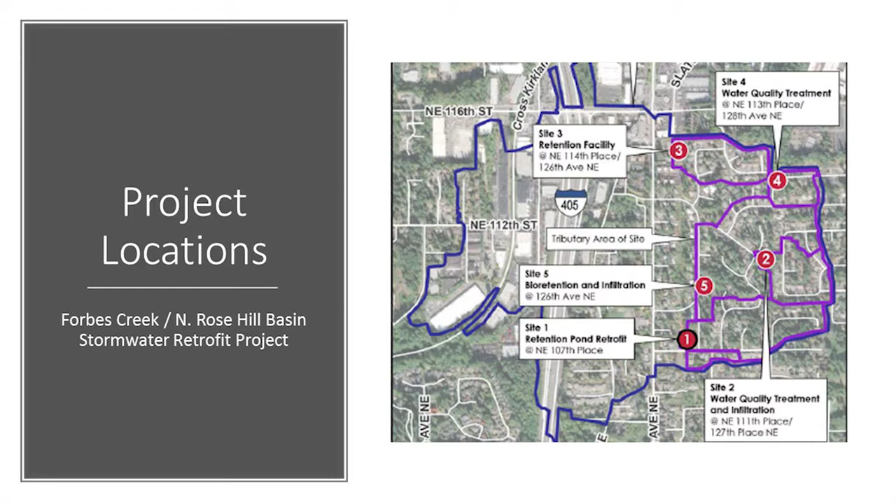Just a little bit about this subbasin in pictures. This is an area of Kirkland that was incorporated into Kirkland in the early 1980s and still retains some of its unincorporated King County flavor, if you will. There are definitely some sidewalks and curbs, but there are a lot of streets that don't have that infrastructure. There's definitely some older vegetation.

And I'm going to say that there's a lot of people in this area that have lived in Kirkland their entire lives, perhaps even have lived in that same house their entire lives. And we definitely met in our engagement a lot of maybe seniors, fixed income and whatnot, that were concerned about things like property taxes and not at all concerned about stormwater. So I share that now in the context before we go into the specific projects, because that absolutely came up.

All right. I want to share a little bit about the basis of site selection and project design. I know there are 6 bullets here. I'll focus on the first 4, and then the last 2 we'll talk about a little bit more in detail in this presentation. So first and foremost, we selected sites that provide the opportunity to treat as much pollutant-generating hard surface as possible. The primary goal of these projects was to provide a water quality benefit, but flow reduction to reduce flooding risk downstream was also a focus.

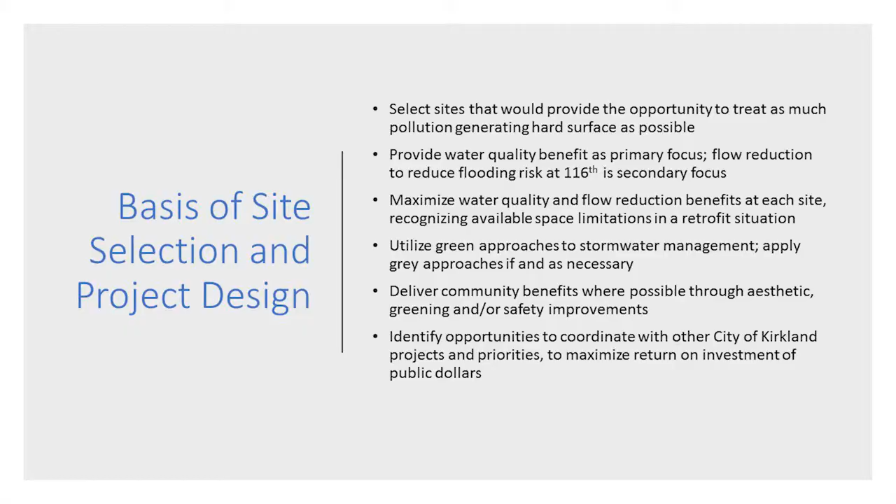All right, so I mentioned earlier when we looked at the map, we went to the public with 5 potential sites, and once selected, we selected as a team 3 sites to move into 30% design, and this is one of the 3. This particular site was an existing stormwater pond, but this project is retrofitting that pond to make it bigger, to put in bioretention, to change the plumbing such that more flow went into the pond, and then also to add some aesthetic features, softening of the edges, some plants that promote pollination and whatnot.

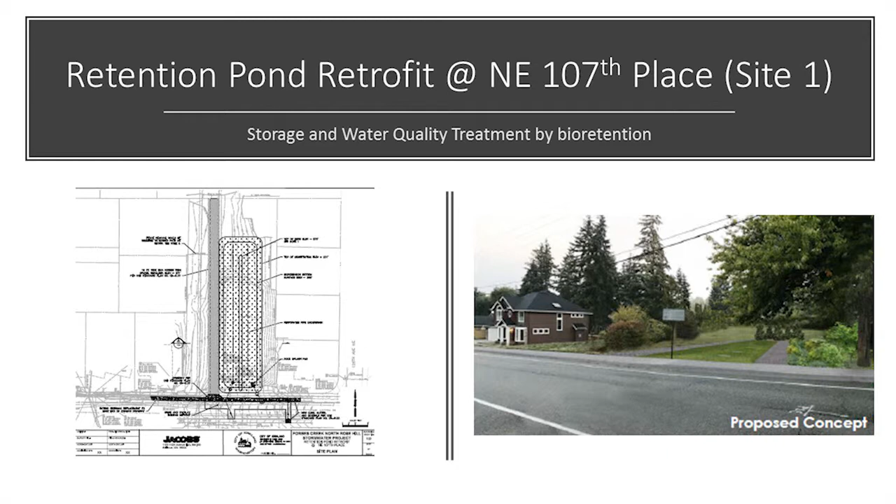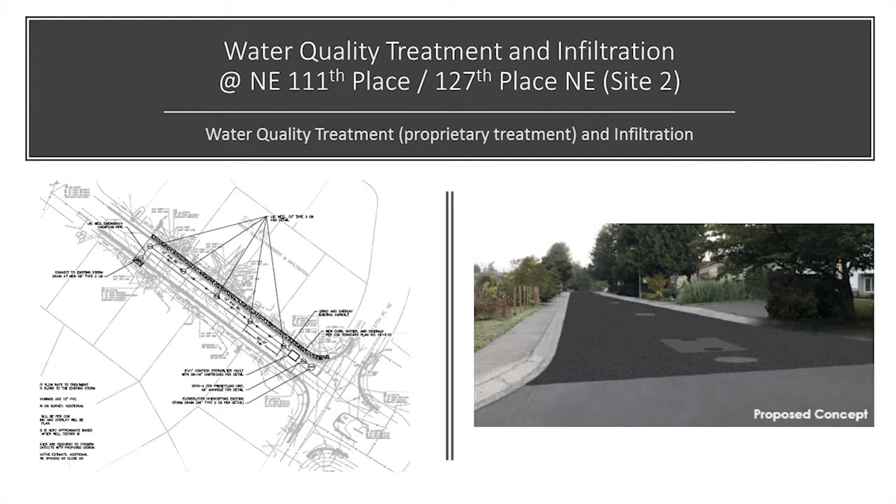This next site, site 2, is actually putting in proprietary water quality treatment and then UIC wells. And this is one that really, in its current form, does not have any sort of community benefits up top on the street side. Once completed, it would be fully hidden. What else to say about this? Maybe I'll just leave it at that.

And then this third site ends up being, we think, the most exciting. It also will be the most challenging. And this is one that has a heck of a lot of elements to it. So bioretention cells to treat stormwater coming off the roadway and then any connected driveways and houses. There's a proprietary treatment to treat the flows coming in from off-site onto this location, and then also storage.

What we really had envisioned from the beginning was using UIC wells at this location. After geotech came back that we couldn't do infiltration, we switched that to storage. So a lot going on here with treatment, storage, and then the bioretention as well.

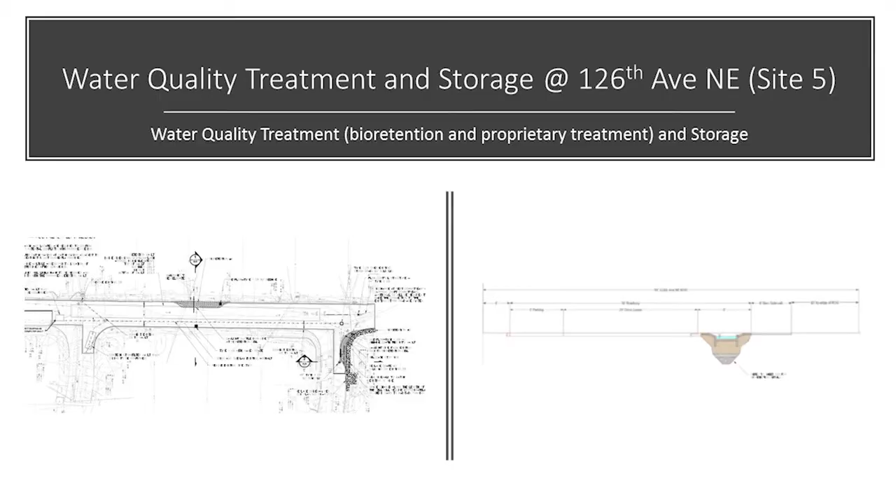All right, so now I'm going to transition to talk about lessons learned, and I'm going to focus on the efficiencies related to site selection and design, and then I'm going to hand it off to Jenny to talk about lessons learned related to the community. So my first lesson learned with efficiencies is just perform survey and geotech early, which is kind of a no-brainer. At the same time, you can't do it everywhere. We couldn't do it at 5 sites. We could do it at 3 sites.

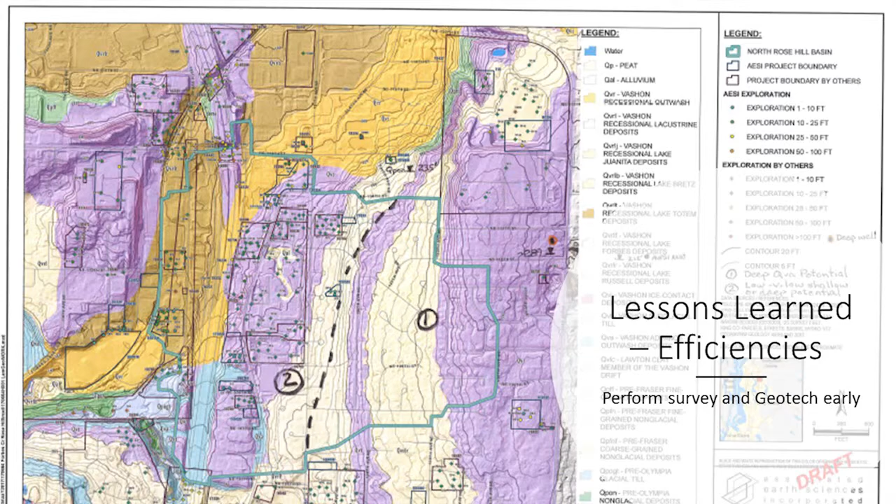And I say that because in the end, this is a good lesson learned as we're putting in 30% design now. We really did have to go back and rethink that last site that I talked about, when we figured that we couldn't do infiltration. We had a nice design there with UIC wells. It was elegant, it was pretty, it was wonderful, and then it wasn't going to work. So something to think about when you're planning a project is when you are going to do that survey and geotech, knowing that the earlier you do it, you might have to do it at more places because you haven't selected your site.

Another lesson learned as far as efficiencies is the importance of coordinating throughout the project. And by coordinating, I mean both with city departments and with the public. I show this cross-section that we actually went to the public with for this last and final site. And we're so glad we did, because we got the feedback that the public wanted to keep their parking, which is not an unusual thing to hear. But also, the public wanted to keep the vegetation that was there.

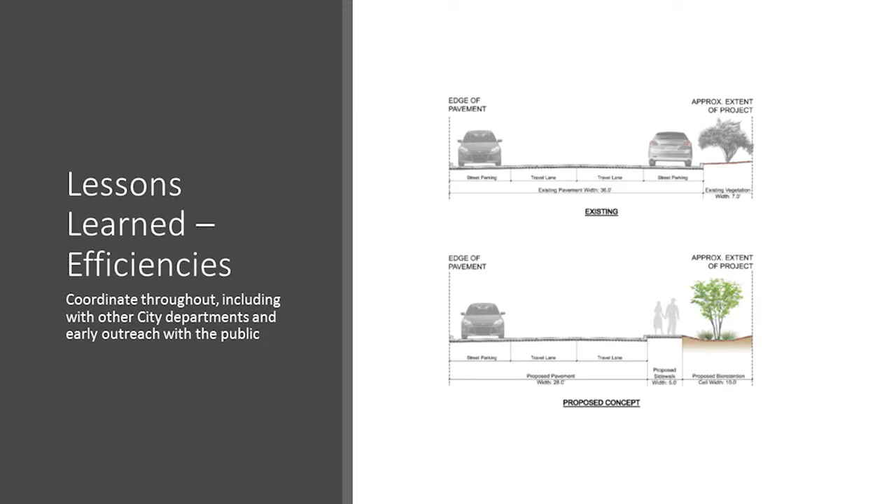And I think the other part of this is coordinating with city departments. Absolutely, we need to know requirements for width of roadway and whatnot. And then two, is there an opportunity to push the envelope or negotiate that within the city before you get too far in the design?

This last lesson learned on efficiencies: stay focused. Identify projects that are implementable and acceptable by the public and stakeholders in the short term. So we took 5 projects to the public. I think one of our favorites was this Site 3, an open piece of property proximate to the Seattle City Light high power lines, a lot of opportunities for stormwater management and a park, and we wanted to do all these things.

But that said, realistically, all of those things take several years at best to get right. A lot of coordination, a lot of rounds and whatnot, and in the meantime, every rain event, more pollutants are going downstream.

And so, I guess, lesson learned in a good way for us on this project is, yes, absolutely, the city should pursue this project, but do it in parallel with advancement of these individual projects under this grant to get those individual, somewhat easier projects in the ground quicker, to get those pollutant reduction, flow reduction benefits quicker, and in parallel work on these meatier, larger, more complicated projects.

And with that, I'm going to hand it over to Jenny to talk about lessons learned with the community benefits.

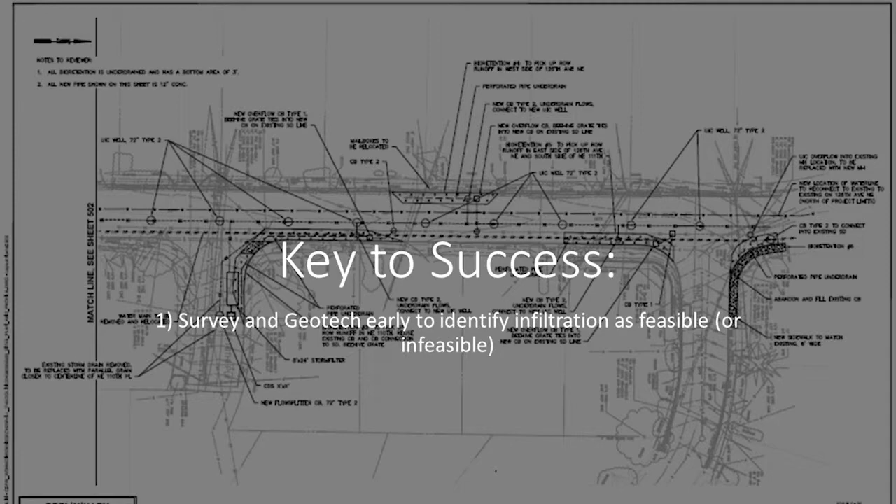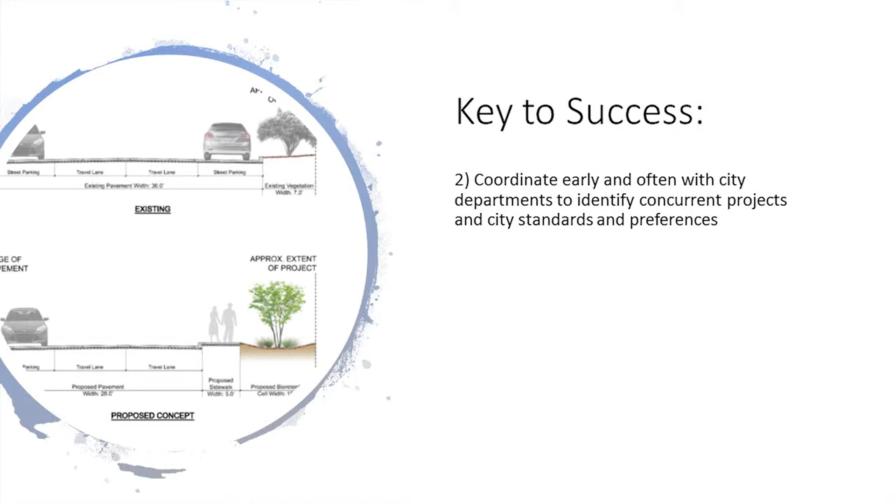So again, coordinate early and often. Talk to your traffic planning folks. Talk to your development folks. Talk to your street preservation program. Is this street due to be overlaid next year and your project is going to come the following year and rip it up? Just all of that coordination stuff that makes people support your project and want to do it came through in this project really strongly, and I think that helped it be successful.

Again, conduct the public outreach early and often. Make it specific and listen. When the community says they want their parking, don't take away their parking. Figure out another way to do the project. And add those benefits that they want and try to help create the neighborhood that they envision.

So again, and then just considering the aspects of the community that are there now. You don't want to be, for example, ripping down existing lovely heritage trees in order to put in your bioretention. That just doesn't make sense. And so considering that as you select your BMPs, with this project, I think we've sort of leaned towards things that are underground, that are in the right-of-way, more than I think we expected to at the outset because of existing community features.

So, and again, include those extra benefits. Kirkland has a couple of other retrofit projects that are currently in construction, and they've gotten there because of coordination with parks, coordination with other street projects, sidewalk projects, things like that. So I can't stress that enough. Just look for those other benefits, those other things besides stormwater that will make your project shine and make it get built. And again, just focus on projects that you can build in the short term. There may be other opportunities that are wonderful that you want to pursue in the long run, but keep those in the back and really focus on those ones where you can get them to the point of getting grant projects and getting them built.